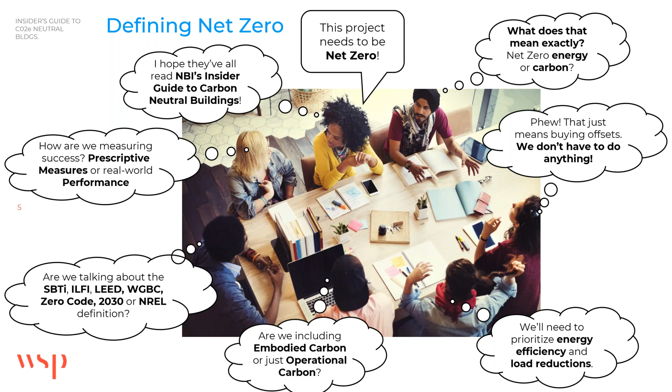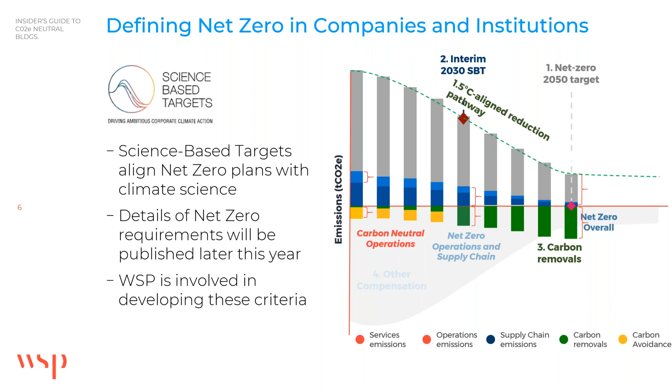One of the exciting things that's happening in the industry is that organizations are really talking a lot about net zero as well. And this has led to a bit of confusion because companies are trying to achieve net zero carbon by 2050, 2040, or 2030. And folks within those organizations are then wondering if their buildings also need to be net zero. There are initiatives to help define what net zero means in the corporate space, and that is turning into and informing programs to achieve carbon neutral and net zero energy buildings.

We are also seeing a lot of discussion around net zero within cities, and you can't talk about a net zero or carbon neutral building without talking about the infrastructure that it is connected to and the various support systems for that particular building, primarily that energy infrastructure.

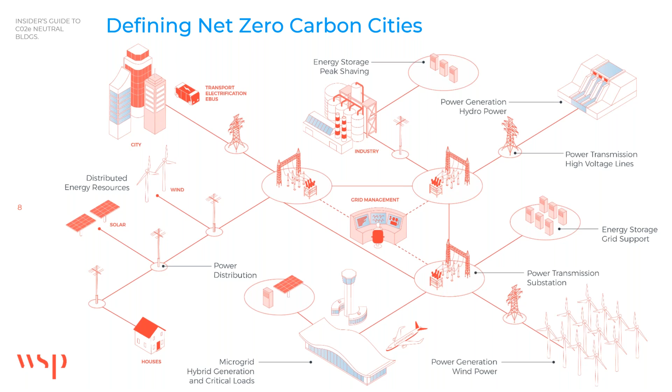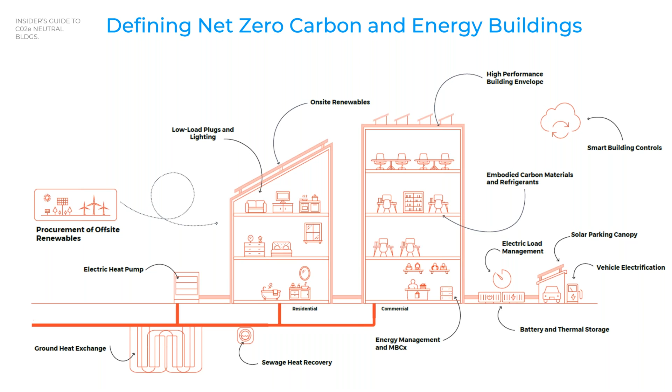But today we're talking about defining carbon neutral buildings. And what we know is that there are a lot of different elements within buildings that are associated with greenhouse gas emissions. And some of those include things that are connected to those buildings like electric vehicles, how that building interacts with the grid, the various types of fuel that are used, and how that impacts greenhouse gas emissions on the site and throughout the grid.

One of the things that we did working with NBI was to look at the many different definitions of carbon neutral and net zero that are out there. There has been a lot of work done to define approaches to achieving net zero carbon and energy buildings. But if you dive into the different frameworks and certifications, they can be quite confusing.

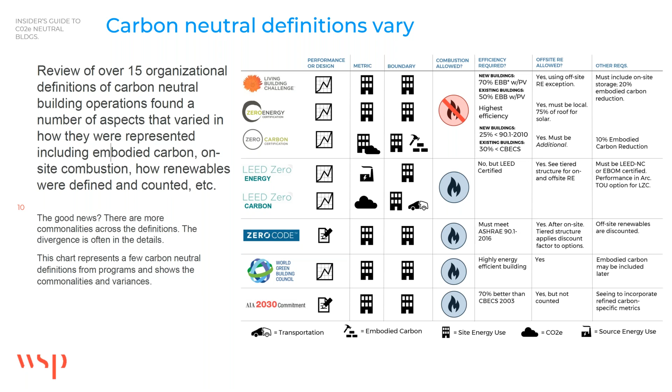Here you can see some of the many frameworks that we evaluated. And one of the goals was to identify common themes in these different frameworks that help us inform foundational elements for net zero energy and carbon buildings.

So the frameworks that we looked at included the ones developed by the International Living Future Institute, the Living Building Challenge, the Zero Energy and Zero Carbon certifications. We also looked at LEED Zero for energy and carbon, Zero Code, the World Green Building Council's definition, the AIA 2030 commitment and 2030 efforts, and a number of other frameworks that were working to define carbon neutral and net zero.

What I'm going to do is walk through some of the common themes and variables that we found in those as a lead into a discussion about the guide and ways that you can navigate and work with your teams or clients to kind of move projects towards true net zero energy and carbon goals.

So one of the questions that is defined in all of these frameworks is how you actually measure the achievement of net zero or carbon neutral buildings. There has been a big push in the industry to prioritize performance and measuring real performance in real buildings once they're in operation. This is how success is measured for the ILFI certifications, Living Building Challenge, Zero Energy, and Zero Carbon, as well as LEED Zero for energy and carbon.

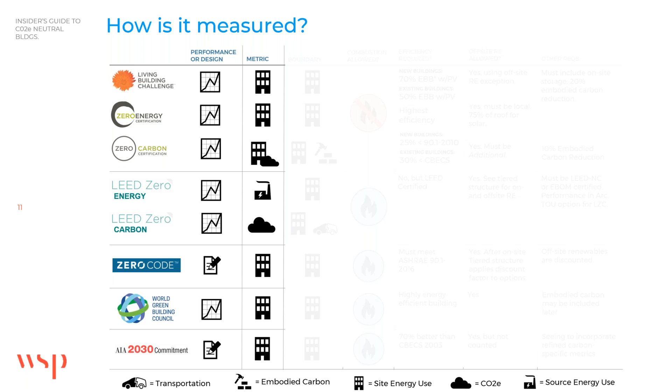We also looked at whether the measurement was either energy or greenhouse gas emissions, and whether it was site or source. Living Building Challenge and Net Zero Energy, for example, measure and require in most cases that you're producing enough energy on site to meet the annual needs of that particular project. But other frameworks like the Zero Carbon certification look at greenhouse gas emissions and include other elements that are associated with greenhouse gas emissions.

Two other elements we looked at were the boundary, and here you see that all of them include the building itself, but some frameworks include embodied carbon and the emissions associated with the materials within the building, structure, building enclosure, foundations. And then certifications like LEED Zero Carbon include transportation and the emissions associated with transportation, which prioritize projects that are located in a city center where people can use smart and low carbon forms of transportation.

Another factor that has been hotly debated for a long time, and we're seeing a big push towards, is beneficial electrification, and really removing the use of combustion or fossil fuels on site. You see different local jurisdictions around the country basically banning the use of natural gas, and a big push towards using electric systems for heating, cooling, ventilation, and other uses throughout buildings.

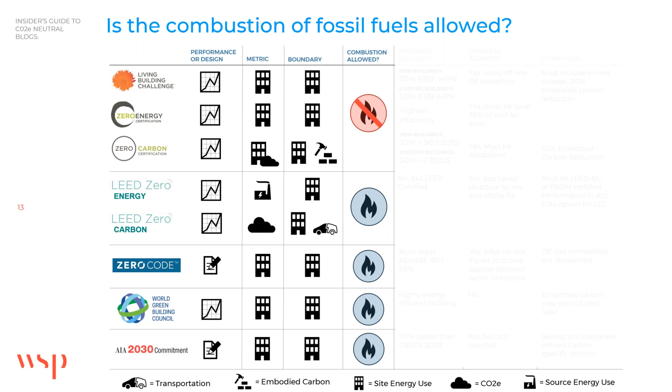The ILFI certifications effectively don't allow combustion. Other certifications do, but we're seeing a lot of change in this space. And I anticipate that there's going to be more and more of a push towards defining net zero by not using fossil fuels on site.

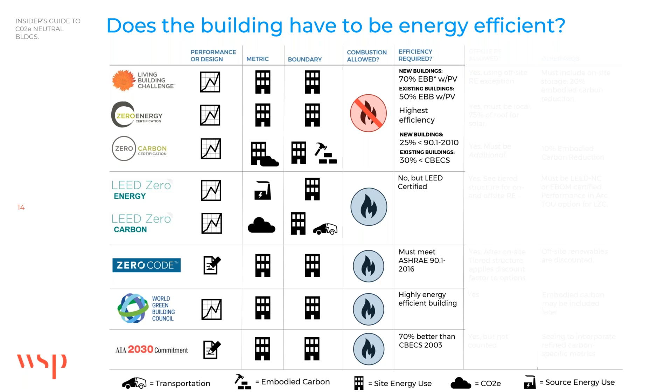There is also a big push towards requiring efficiency and ensuring that people aren't just installing a bunch of renewable energy on or off site or buying offsets, but making sure that the building energy use and loads are significantly reduced. And so a number of these frameworks require certain energy efficiency standards. And some of those are based on specific codes or existing building metrics like CBECS. Others, like the LEED Zero frameworks, don't have a specific energy efficiency requirement, but require that you achieve LEED certification, which is associated generally with more energy efficient buildings.

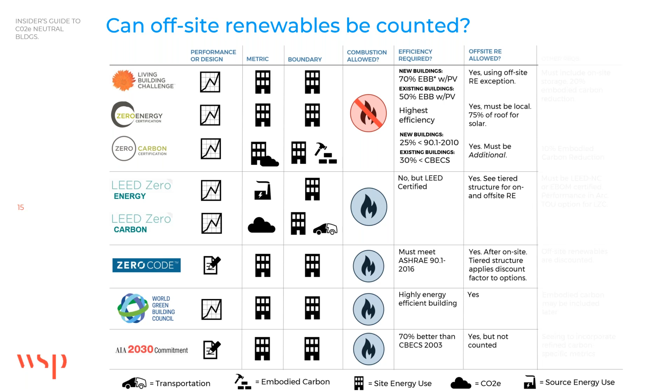We also see some variation in terms of whether off-site renewable energy is allowed, and this has been hotly debated for a while. We're seeing more expansive approaches to community solar projects supporting buildings with solar and renewable energy assets not on site. I'm based in New York City, and this is critically important there. There's no way you can put enough solar on a building in Midtown Manhattan to make it net zero, but some buildings can buy into a community solar project that helps effectively make it net zero carbon, and in some cases net zero energy.

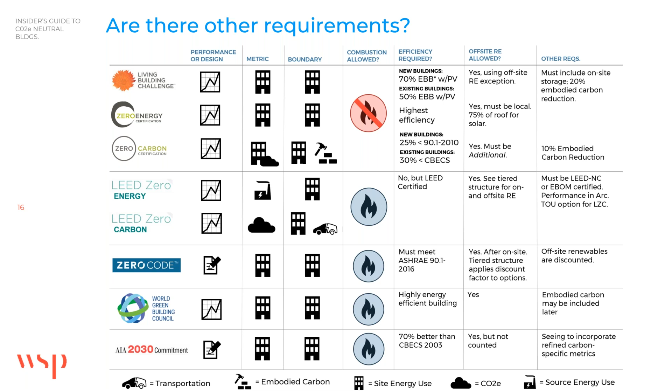There are a number of other elements associated with carbon emissions, like grid integration and real-time carbon emissions and how that impacts overall emissions for the project, incorporating time of use options, looking at embodied carbon, which is a big focus for a lot of folks right now, and understanding how to prioritize and value on-site and off-site renewables.

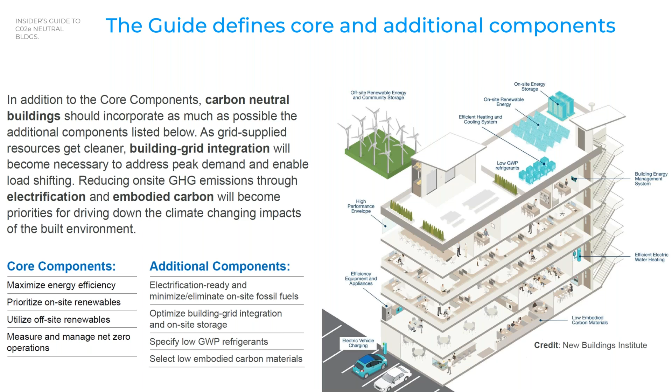There are details in the guide about these. Webley and others will talk about these in a few minutes, but they're the core and additional components of carbon neutral buildings. On any one project you may or may not be looking at all of these, but there's no way we can get to carbon neutrality by 2050, 2040, or before without doing every one of these, core and additional components. The way we tend to frame these is by looking at how they all interact in specific buildings to get to a zero carbon building, including what's happening within the building as well as within the grid.

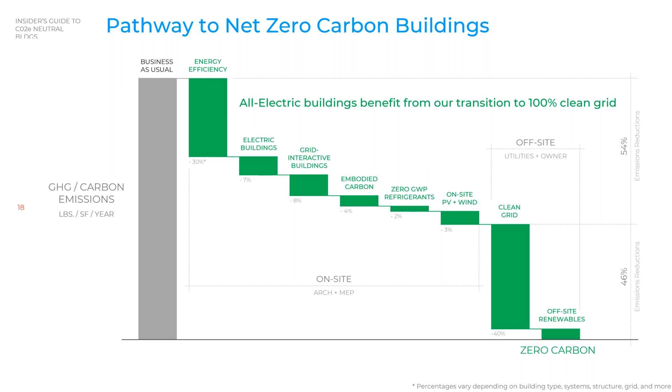So with that, I'll pass it back to, I think, Webley. Great, thanks, Narda. Do you have one more slide there? No, you can go to the next slide.

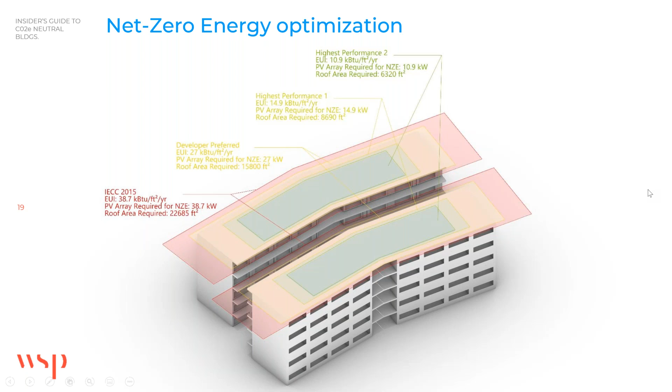Hi everyone, my name is Webley Bowles. I am a project manager at New Buildings Institute. I work in the Getting to Zero and the Codes and Policies program areas. Give me a minute—there we go.

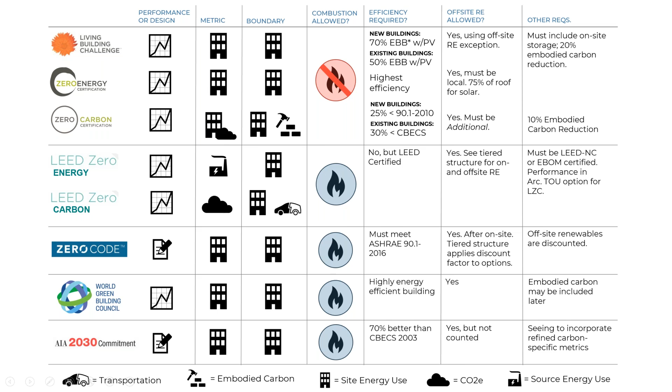So we have developed this guide, the Insider's Guide to Talking About Carbon Neutral Buildings, as a way to pare down the main elements of carbon neutral buildings and help clarify some concepts. Our intent is not to define carbon neutral per se, but to help communicate what should be known about the topic at a high level. Narda kind of introduced us to it, and I really appreciate that, so we'll dive just a little bit deeper.

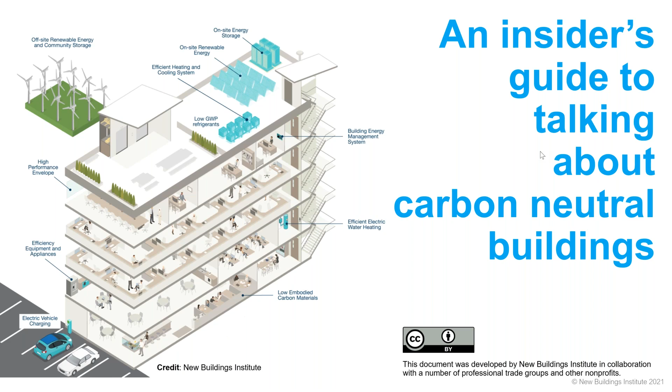So we thought we could come up with a definition that helped link the different ideas, but we saw there was more of a need for a framework because carbon's a little bit shifty. Are we talking about operational carbon, upfront embodied carbon, whole life? As Narda showed, this topic isn't just a simple 'okay, cool, let's go'—there's a lot of questions around it.

So it's the difference between looking at graphite and diamonds. Both of them are carbon, right, but those are not equal—very different elements, and we need to define those. When we talked about net zero years ago in zero energy, we came to the same place of, what is the definition? What we understand is that we really need to define what is graphite and what is diamond, so we know we're talking about something similar.

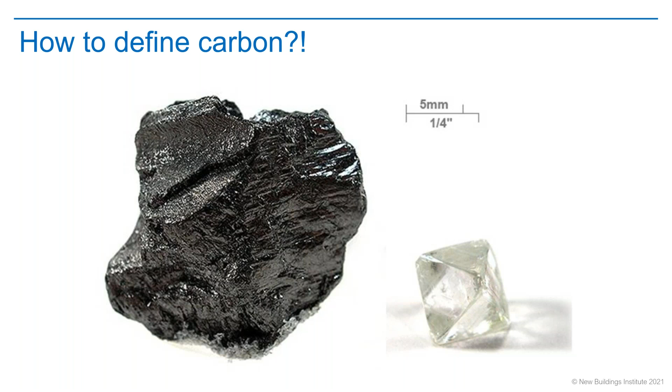And... went too far.

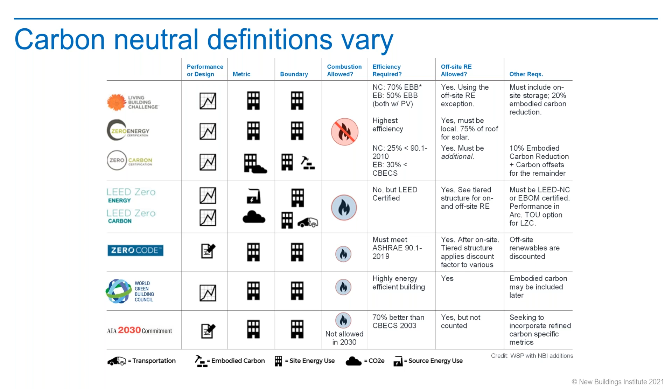There we go. This is a graph from WSP, which we really appreciate that they developed. We were doing similar research, looking at these different definitions, and they were doing something similar. We're trying to find the similarities and differences in what is carbon neutral—how were they representing embodied carbon, on-site combustion, how are renewables defined? As Narda mentioned, it's a hot topic: do we allow offsets or not, does it have to be renewable energy only? There's a lot of questions there. While all these details really vary, there are a lot of commonalities, and the divergence is really in the details.

I've got a spastic mouse here. What's happening?

Okay, when we look at the additional components, these are the things that will lead us to carbon neutral buildings. While the core components are still essential, we want to move towards looking at carbon: electrification, building grid integration strategies, low global warming potential refrigerants, and embodied carbon.

Before I go on, I want to note that it's important to remember these are all at a very high level. There can and will be entire books written about each of these topics. This guide is intentionally high level, as every organization, program, and project will have their own goals and objectives that will change the details for all of these.

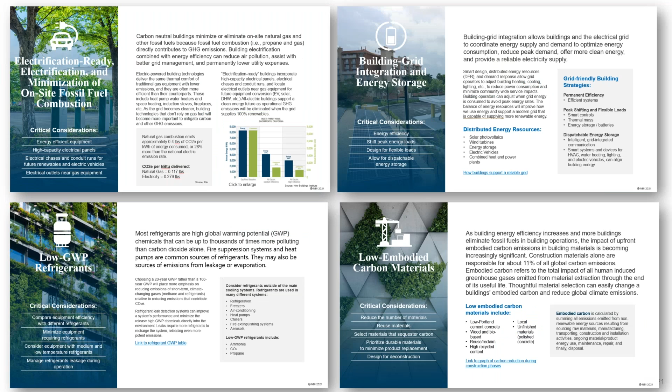When we look at the additional components, we see building electrification, building grid integration, energy storage, low global warming potential refrigerants, and low embodied carbon materials are all there. And these components ask us to think past the property line.

For example, when we're talking about building electrification, this has been getting more attention lately, and it's important, and it will continue to rise, because with electrification and electrification-ready, it's preparing us for this carbon neutral future. As the grid uses more renewable energy, our building emissions will be reduced. Not all buildings are going to be able to go 100% all electric, so we need to have some opportunities for getting there in the future and making that transition a little bit easier.

I'll address the last two components at a high level still, since they're a little bit new, but not really — they're just getting a bit more attention. Refrigerant global warming potential, or GWP, has been considered at the international level since the 90s, so again, not new, but we're bringing more attention to it. There's been more regulation for years around the ozone depleting potential and global warming potential from these refrigerants.

But there's still opportunities to continue to reduce the emissions from refrigerants, especially with the rise in heat pumps for heating, cooling, and water heating. We're going to be using more refrigerants in these systems, and so we need to find ways that we can reduce our emissions around them.

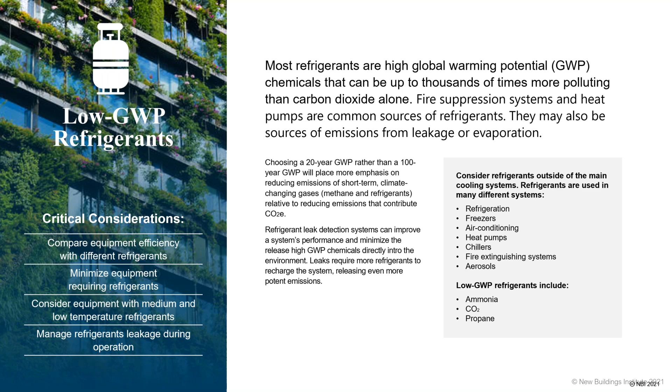Low embodied carbon materials is another place we've been discussing for 20+ years, but there's a new spotlight on these high impact materials. As buildings become more energy efficient, materials are making up a larger percentage of the total carbon. In some cases, up to 50% of the total carbon of a project is coming from materials.

So this is another area where we can play the same name game and talk about upfront embodied carbon, operational embodied carbon, and whole life embodied carbon. Many other resources will help support projects around these terms. As building codes start to address carbon and not just energy, designers will have to become more familiar with reducing embodied carbon, and concrete and steel are the best places to start.

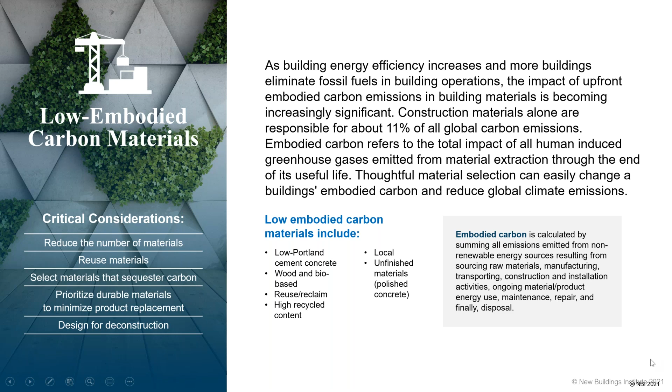I hate not telling you every single detail about these components. This guide is high level, and we have references in it. There are hundreds of considerations on these topics addressed by different programs, project boundaries, tools for converting energy to CO2e, regional energy sources, carbon intensity based on time of use, and other nerdy details. My colleague Misha will get into some of these fun details next, so I'm excited for her to present that.

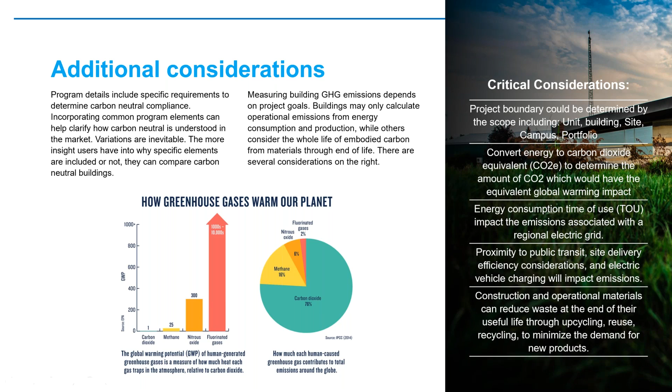But before I leave, I want to let you know that no matter what you're calling your building—net zero, carbon neutral, zero carbon—it's important to know what components you're addressing, but more importantly, it's important to know what important components you're not addressing in your project.

Not all projects can address all components, whatever the site constraints, but it's important to consider how these can be addressed in the future, because the future is really what we're building about. We're all trying to move to a carbon neutral future. How can we do that? These 8 components can help us get there. So thank you, and I'll hand it over to Misha.

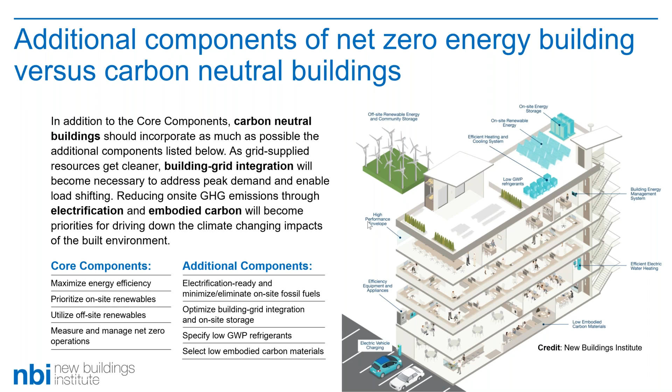I'm going to provide some additional details on the great information Webley and Narda already provided, and specifically talk about how zero carbon goes beyond zero energy, and how the times that the building is actually using energy affects its ability to reach zero carbon.

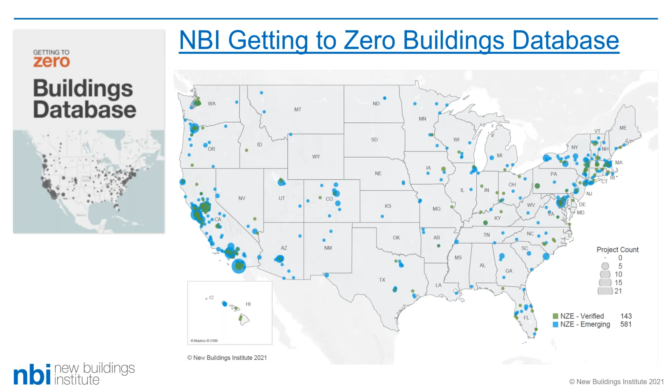As some of you may know, NBI hosts the Getting to Zero database, a comprehensive list of zero energy commercial and multifamily buildings across North America. We have projects all across the country, over 700 of them. This isn't something that happened overnight—we've seen a lot of growth since we launched the database, going from just 60 buildings in 2012 to more than 700 buildings today.

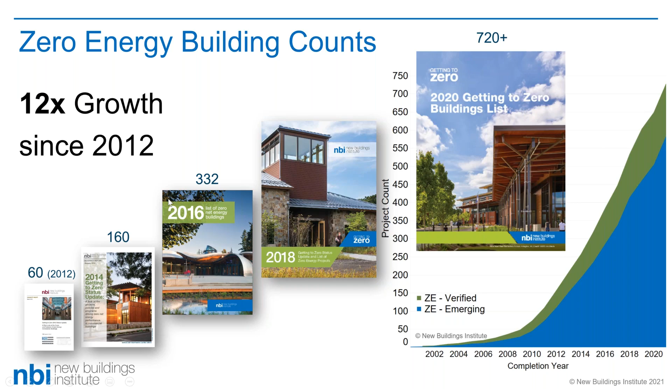As Webley said, this is attributable to decades of regulation and programs oriented towards energy efficiency. But in recent years, we've seen a shift in the building sector to also emphasize carbon and greenhouse gas emission reductions. So as we look at both zero energy and zero carbon buildings, it's important to understand the difference between the two, and I want to show you some examples.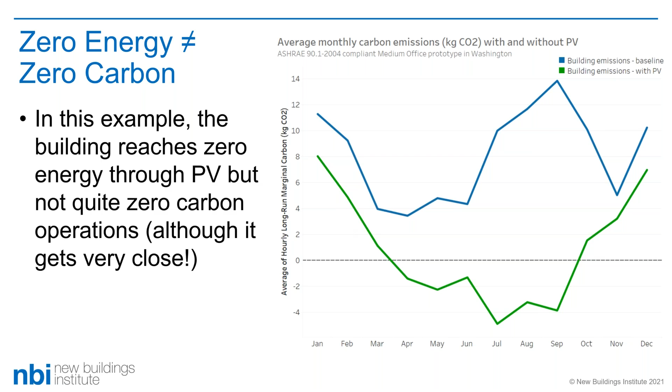You can see that the areas above the zero line are still a little bit more than the areas below. So why is this the case? Let's take a step back, and I'll revisit some of the components of a zero energy building and a zero carbon building, and some of the considerations Webley was mentioning.

As we've talked about, when you're looking at a zero energy building, the key components are maximizing energy efficiency, looking at on-site and off-site renewables, and streamlining your site operations, keeping an eye on them and fine-tuning them. When you start to look at zero carbon as well, you have to expand your scope.

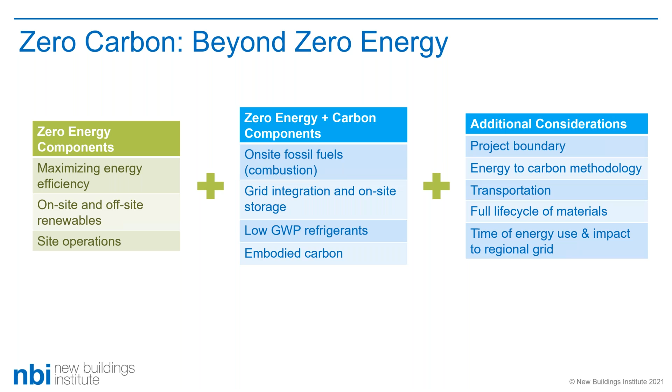As Webley and Narda mentioned, you have to start looking at grid integration and on-site storage, whether or not you have on-site combustion of fossil fuels, what kind of refrigerants you're using, and the embodied carbon of the materials you choose. And then there's also all of these additional considerations that Webley mentioned, like where your project boundary is defined, the methodology that you're using to come up with your carbon equivalencies, the transportation around the site, the full life cycle of the materials, and lastly, the time that you're actually using energy and the impact to the regional grid.

I'm not going to go through all of these in detail. Like Webley said, we have a short amount of time today, so I can't take a deep dive, but just trying to illustrate some of those additional considerations and some of the questions that those raise.

So for example, if you're looking at your project boundary, are you looking at a single building? Or let's say you're on a higher education campus, are you looking at the entire campus? Obviously, reaching zero carbon looks different for each of those scenarios.

And as you move through all these questions, as Webley mentioned, you have to think about not just your operational carbon, but embodied carbon as well. I think that's particularly important when you're thinking about the life cycle of your materials. So how will the materials be handled at the end of their useful life? Are you going to upcycle, reuse, or recycle, or is it just going to the landfill?

I'll also mention that the methodology you use to convert your energy use to a carbon equivalency, those calculation requirements vary by program and jurisdiction. It also makes a difference if you're looking at your predicted energy use or actual performance-based, hard numbers. So there's a lot of things to think about, a lot of questions.

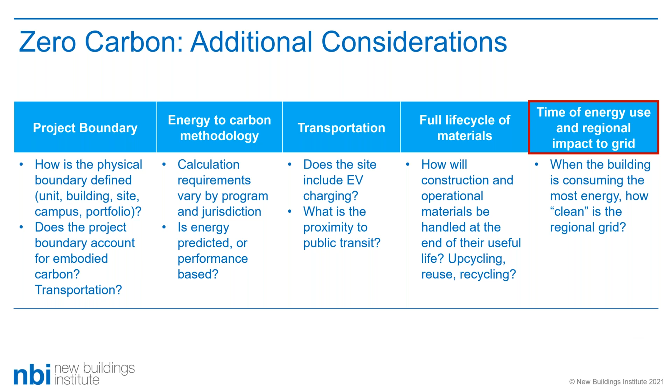But I'm going to take a little bit of a deeper dive into this idea of your time of energy use and the regional grid impacts there. So to understand this dynamic between energy and carbon, you first have to recognize that greenhouse gas intensity varies hourly, daily, and seasonally, depending on the generation sources that are being utilized.

So I have an example here of the projected 2030 grid. This is provided by NREL in their Cambium data set. This is a forecast, basically, and this is their long run marginal carbon metric. So I have here the state of California, and then the Seattle area, once again, Washington here.

The green areas indicate lower carbon times, or what you could think about as a cleaner grid. That could mean more renewables or hydro online. And then the black areas are when the grid is the dirtiest, so when generation is predominantly from fossil fuels.

So you can see that in California, all throughout the year, January through December, in the mornings and in the evenings, you're going to have higher carbon generally. And in the middle of the day, predominantly solar is available, so you're going to have lower carbon because that's the generation source that's being pulled.

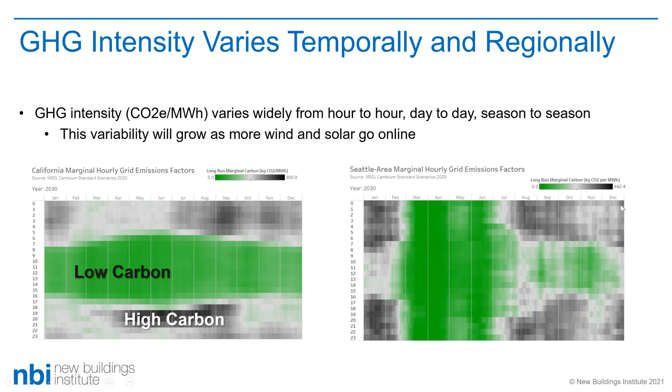For Seattle, it's interesting, it looks a little bit different. We have a lot more renewables, hydro here in the summer and spring. So you can see that the grid is a lot cleaner throughout the day in those months. But then especially as you look at January, the grid really changes. I think this is a good representation of the variation that we're working with here.

So this is kind of a monthly average. Obviously this isn't an exact number, but just to give you an idea of the shape we're looking at here. This means that you're not really saving anything in terms of carbon. So we say, okay, let's add some on-site solar and see how that affects the picture.

So we see here that the building's peak is still happening in the early morning when grid carbon is high. We're decreasing our load quite a bit midday when the sun is out, but in the case of the Seattle grid specifically, that really isn't helping with your operational carbon. So you're definitely going to save money on your electric bill, but you may not see a significant decrease in your operational carbon emissions.

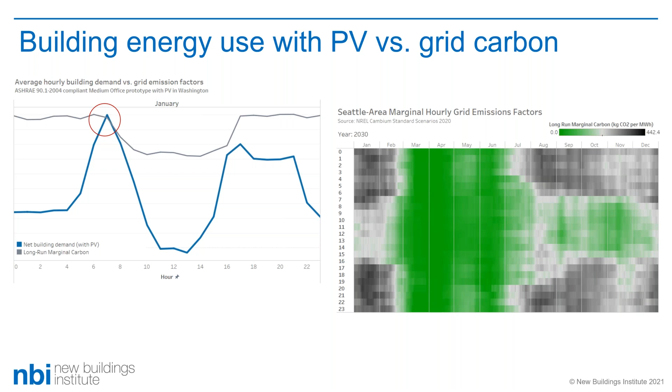That's just one quick illustration, but I guess I just really want to emphasize that every grid is a little bit different and every building is a little bit different. As I mentioned, the building vintage and the building type are going to change things. The grid that you're in, the grid region, and where that generation is coming from are all going to be variables. So in this graphic, I did just want to zoom out a little bit and show that for this analysis that NBI conducted...

We found that what it takes to reach zero carbon operations is pretty variable. The dashed line is showing the threshold for zero energy operations in this all-electric building scenario. You can see from this chart that depending on the grid region, you can actually reach zero operational carbon before you reach zero energy in some cases. But in other cases, you need to over-generate to reach zero carbon. So you're seeing some of that here where you have to produce a lot more energy in some of these cleaner grids.

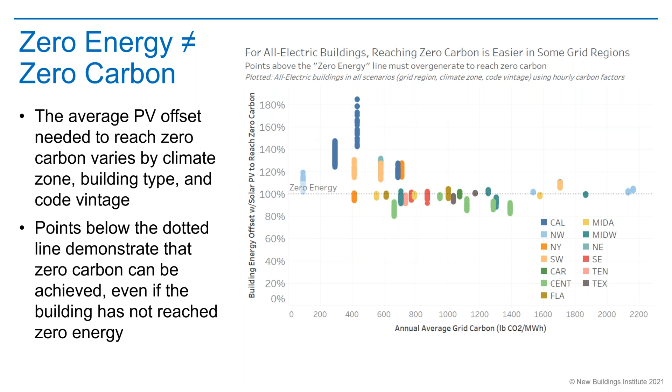So to wrap up, reaching zero carbon is totally possible. We saw that on the previous slide. It's just a question of how to get there.

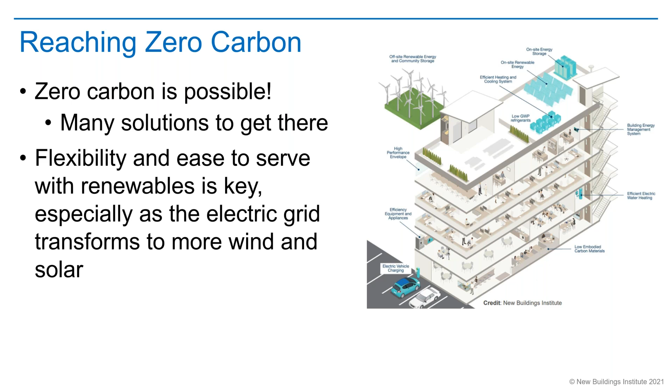And thinking about this concept of when you're using energy in the building is really important. There's a lot of solutions, as both Narda and Webley have hit on some of those. But as Webley said, maximizing energy efficiency is going to continue to be really important, especially energy efficiency that's really focused on time of use. So if you can tune your building through time of use measures to take advantage of abundant clean energy when it's available, and then perhaps coast through the times when the grid is really dirty by adding storage, you're going to be well on your way. That's potentially a really winning strategy.

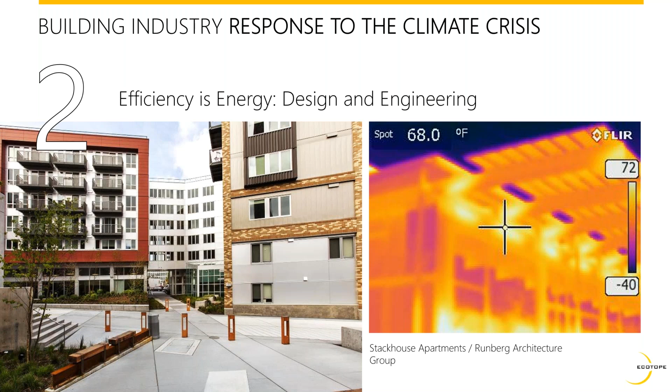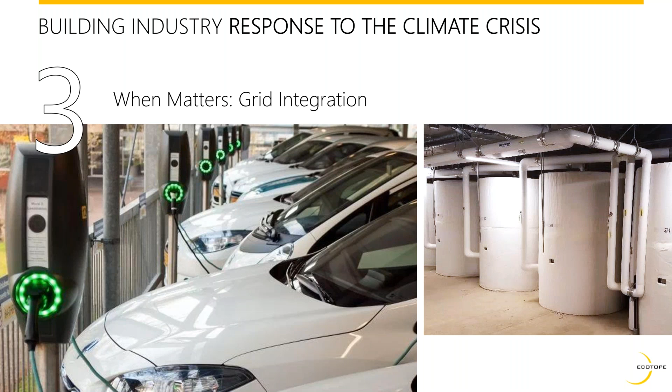And third, this is what Misha was just talking about - changing the relationship between our buildings and the grid, so that it's not just a one-way relationship where, like we're used to, you flip a switch and expect to get power whenever you want it, but a two-way relationship so that the buildings start to tune their use of energy with when the grid is clean and when solar and wind are available, and not use energy when the grid is dominated by fossil fuel usage. In the future, we'll see this through on-site battery storage and potentially in our vehicles, feeding back to run our buildings off of the vehicle batteries, to large amounts of thermal storage located in the buildings for use at a later time.

So to bring this into a case study, all three of those primary responses to the climate crisis come together in the work that we have been leading around the commercial heat pump water heater product development in the Advanced Water Heating Initiative led by NBI.

So the vision for this technology is that we are changing the standard practice of heating water in multifamily and commercial buildings with gas to using commercial heat pump water heater systems that are able to deliver COPs of 3 or better, so using a third or a quarter of the energy of a gas system or electric resistance system. Using low global warming potential refrigerants in those heat pumps, delivering them to the market in a plug and play fashion so that they're easy for the designers and installers to get into the buildings. They're affordable, they're reliable, and they have this ability to shift the load off of the peak times.

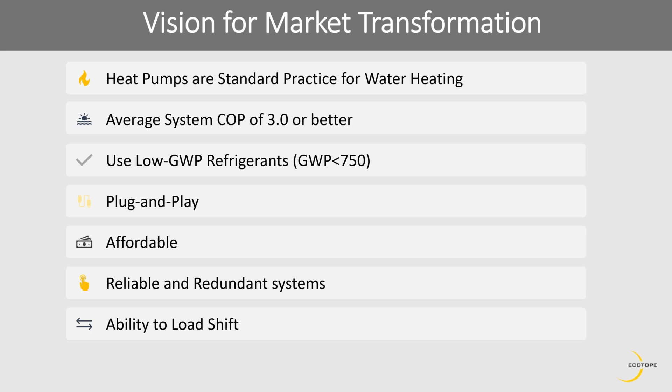And right now we're really focusing on this plug and play concept because we're trying to shift. Commercial heat pump water heaters have been around for quite a long time, but have made very little impact on the commercial building market, primarily because the heat pump manufacturers have been selling heat pumps that require specialized knowledge on the part of the designers and installers to build up a custom system within a building to use that product.

And so we're trying to shift the manufacturers and the supply chain from selling heat pumps to selling water heating systems. And the system includes all of the components that you would need for a fully functioning water heating system. Deliver that in a way to the marketplace that it reduces the risk for the designer and installer and owner. It's able to get reliable, repeatable results every time, and we begin to bring the price down and the reliability up of those systems.

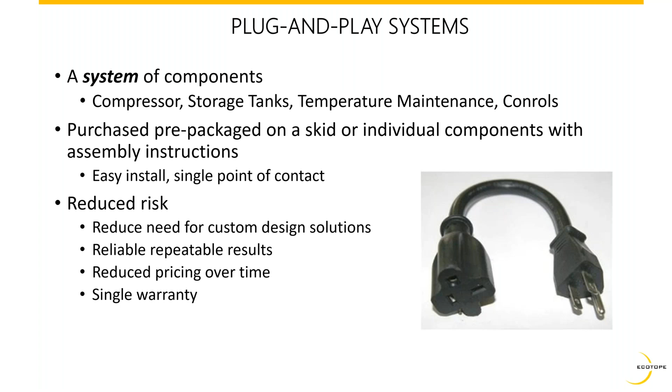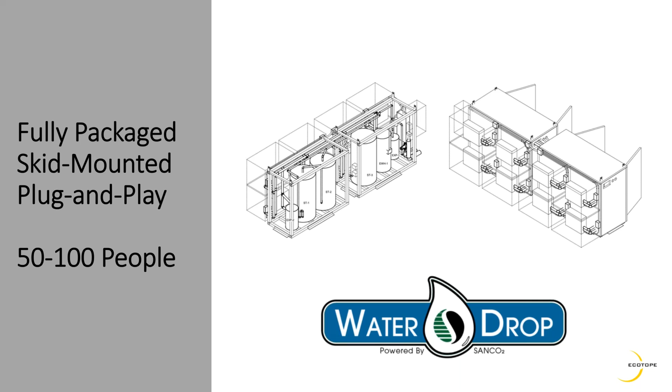And what we're beginning to see in the industry is packaging up all of those parts and pieces for the larger complex system into a single package so that it can be delivered to the marketplace in much the same way that the residential heat pump water heaters are, as a full package that can be dropped on the roof and connect the water and connect the power, and you've got your water heating system.

And so, some of the systems will continue to be delivered in what I kind of am calling the IKEA approach, where you get all of the parts and pieces that are needed and assemble them on site, but really trying to shift the thinking in the industry from heat pumps to water heating systems. And we've worked with the Northwest Energy Efficiency Alliance, which has managed an advanced water heating specification for residential equipment for several years, and added a commercial section to that specification.

So we'll have a qualified products list of fully integrated commercial heat pump water heater systems that can be rated, since different equipment in different climate zones under different configurations will give you different results. And this specification will be a tool for the industry, for the utilities, for the designers to compare these different systems.

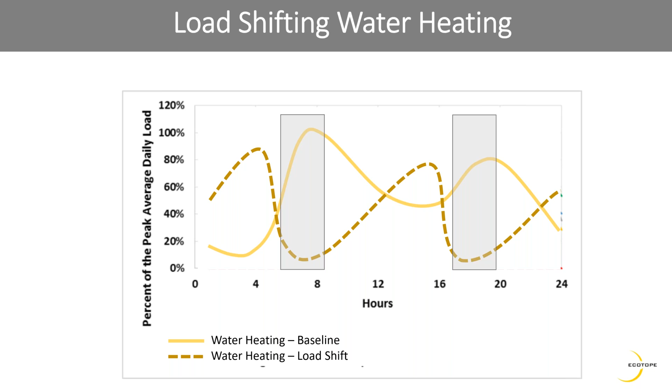So a case study of this equipment that we've just completed here in Seattle is at the Bayview Tower, which is owned by the Seattle Housing Authority. It's an affordable housing project, 11 stories, 100 multifamily units with an existing electric resistance water heating system, central water boilers, fully occupied building in a tight urban setting.

And we wanted to retrofit the building to use a commercial heat pump water heater system. So we couldn't turn the water off for any significant amount of time because it's a fully occupied building, and it's a very tight site, so there's not a lot of place to work with.

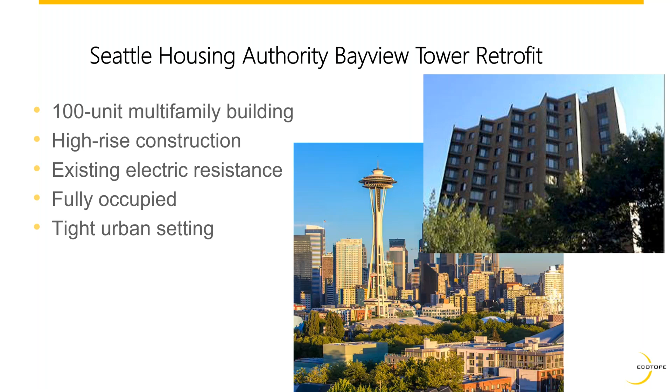So we've been working with Mitsubishi Electric to import a new to the US CO2 heat pump water heating system. So it's using CO2 as the refrigerant as opposed to one of the higher global warming potential refrigerants that are more typical in this equipment in the US. And worked with them to package it up with storage, controls and design schematic to make it all work as a package.

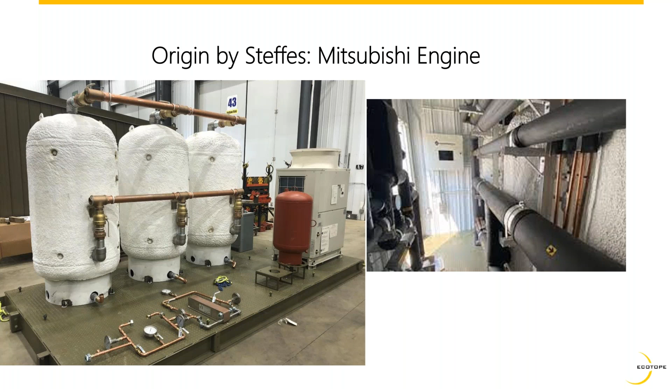And then worked with a third-party assembler, Steffes, to build it into a pre-manufactured package to deliver to the site. And these are some pictures of them building that up in their factory. And then we packaged it up into an insulated, effectively a penthouse that includes all of the parts and pieces needed for a water heating system, and craned it up onto the roof and made the switch over from the existing water heating system to this new heat pump water heating system.

In this case, since it was a retrofit, we left the existing system in place as backup, and it allowed for just a couple hours of switchover time needed, so the residents never really knew that it was happening. This product is in development to be sold to the marketplace in the US, and the Mitsubishi product will also be available in that IKEA approach, with all the parts and pieces to be assembled on site if that's what the designer and installer prefers.

But this is making the implementation of these systems much easier, so that we can have a low global warming potential refrigerant, highly efficient heat pump that is capable of load shifting, made available to the market in an affordable and plug and play fashion. That's all I've got, and I think we'll open it up for questions now.

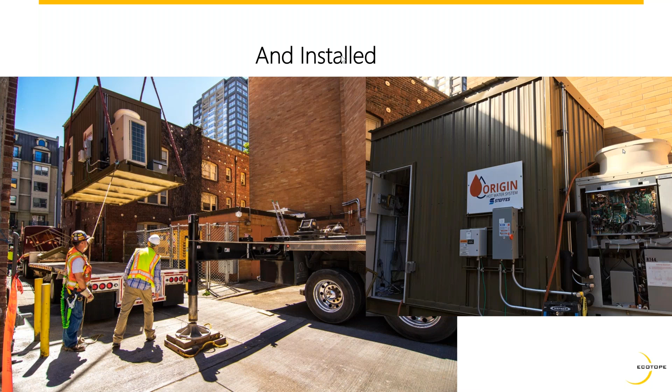That's great. Thanks, everybody. I'd like to have my presenters go ahead and turn on their camera. All right. Almost there. Excellent. Hey, John, we're going to go ahead and start with you with a question.

Mitsubishi is having their launch, I believe, in October of that product that you see in the photo there still. That's the QAHV. Lync has brought a product to the US recently. They're owned under Watts. Watts is the parent family in the US, and they sell all kinds of plumbing equipment. So they're going to be selling a complete package, including storage and so forth.